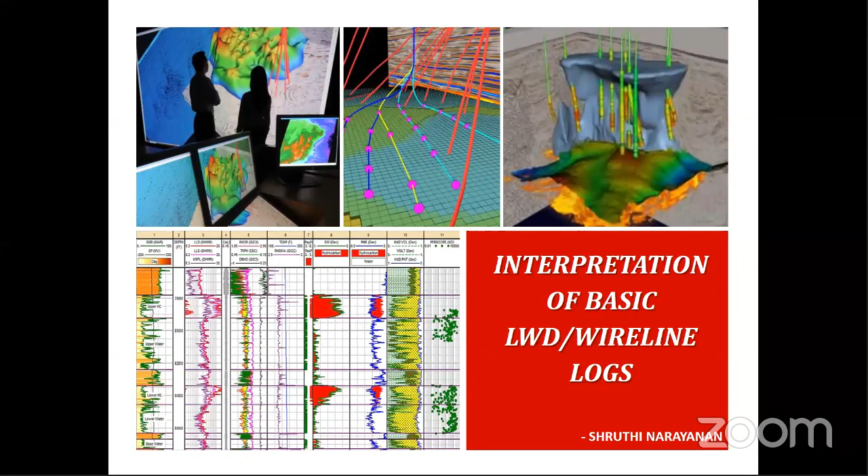Moving on to the agenda of the webinar, I will begin by giving you a brief idea of LWD and wireline logging, the concepts, differences, and their objectives. This will be followed by a section on interpretation of the basic logs such as caliper, SP, gamma ray, resistivity, density, and neutron. The final sections will cover qualitative and quantitative interpretation of the logs.

LWD and wireline logging concepts. Coming to the concepts of LWD and wireline logging. LWD is short for logging while drilling. It is the measurement of formation properties during drilling. It is a technique of conveying well logging tools or sensors into the wellbore as part of the bottom hole assembly. The figure is an example of an LWD tool provided by Halliburton. It conducts the directional survey as well as measures total gamma ray of the formation being drilled and simultaneously displays data to monitors at the surface.

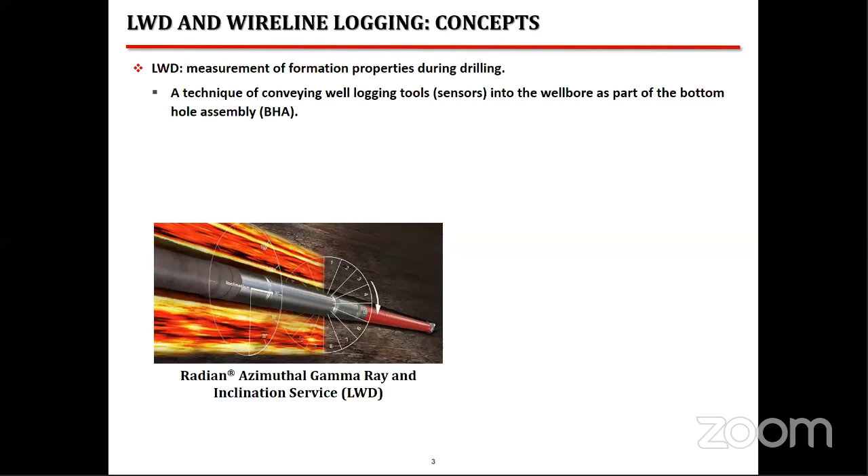The next is wireline logging. Wireline logging is the measurement of formation properties after drilling of a section is concluded. It is a technique of lowering a string of one or more instruments or logging tools on the end of a wireline into a borehole and recording petrophysical properties using a variety of sensors. The figure here is an example of a wireline tool provided by Halliburton. The logging suite provides us the standard range of logs from caliper, gamma ray, resistivity, to porosity, that is neutron and density. LWD and wireline tools and services are also provided by other service providers in the oil and gas industry.

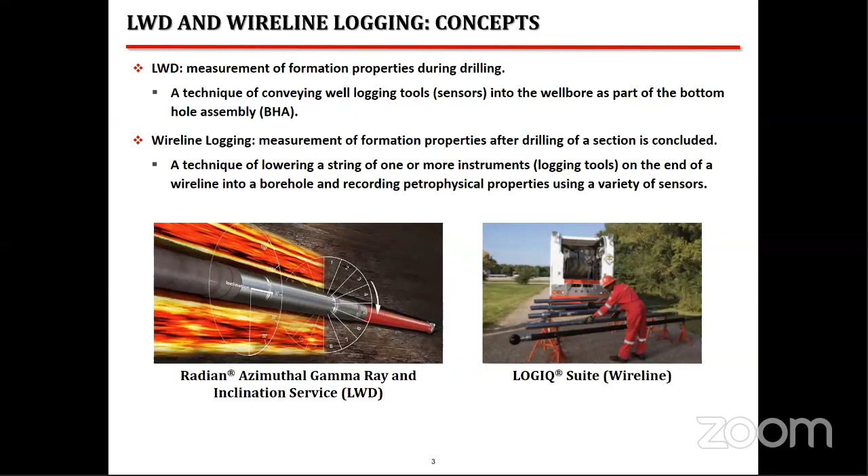Now, for the differences between LWD and wireline logging. The major differences stem from the differing timing of their use. While LWD is carried out while drilling, wireline logging is carried out after drilling of the section has concluded. As a result of this, wireline logging utilizes additional rig time, while LWD is less time consuming. Another important point to be noted is that the LWD tool or sensors form a part of the bottom hole assembly. Because of this arrangement, LWD possesses some advantages over wireline logging.

These are: number one, LWD is very useful for directional or horizontal wells, while wireline is preferred for vertical wells. This is because an LWD tool can provide better depth accuracy and improved well placement during a directional survey. Also, during the drilling phase, the drilling mud is in constant movement in the wellbore, due to which issues such as tool stuck up or mud invasion into the formation can be largely negated. On the other hand, these are major issues encountered in wireline logging which lead to severe NPTs.

Now, the fact that the LWD tool forms a part of the BHA also negatively impacts the value of an LWD survey in the following manner. The most important is that only basic tools such as directional tools, caliper, gamma ray, and porosity can be attached to the BHA, as adding more tools increases the weight on bit, which in turn will necessitate the use of a higher horsepower rig than required. However, even advanced logging tools such as NMR, FMI, and CBL VDL can be run using wireline and small horsepower rigs. Also, during the drilling phase, the borehole environment is constantly changing. That is, it is dynamic in nature, and hence the associated vibrations or movements produce more noise than in a nearly static wireline logging borehole environment.

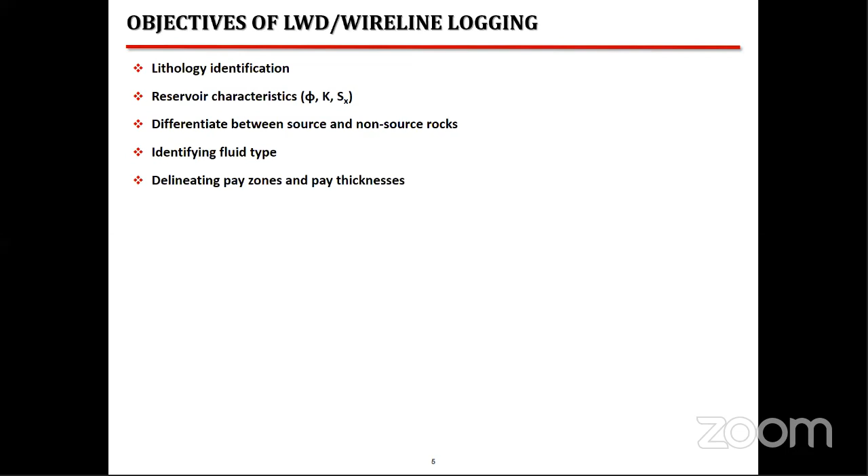Differentiating between source and non-source rocks such as sandstone and shale. Identifying the fluid type, whether water or hydrocarbon is present. Delineating pay zones and pay thicknesses, that is, identifying the exact depths at which hydrocarbon occurs. Locating fluid contacts. This involves marking the depth of the last known hydrocarbon or the depth at which fluid changes from hydrocarbon to water in the formation.

Lastly, the logs are used for well correlation in order to determine the areal extent of a reservoir. This takes into consideration the formation attitude, facies variation, both vertically and laterally, and the depositional environment. Now, for any particular depth interval, it is imperative to carry out the following essential deductions. We need to first delineate a reservoir from a non-reservoir. A reservoir usually has high porosity, whereas a non-reservoir has low porosity.

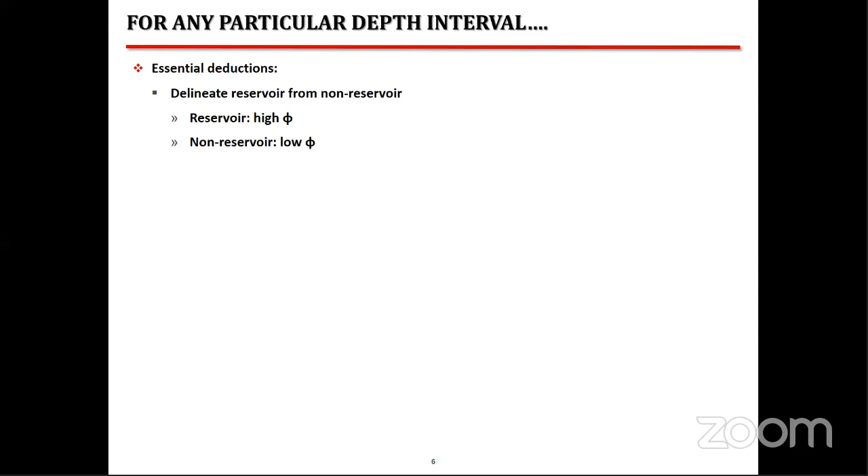Once you identify the reservoir, the next deduction is to determine the fluid type and saturation. Water, being usually saline in the formation, is highly conductive and hence low resistivity, and it has high water saturation. Hydrocarbon, on the other hand, is highly resistive and has low water saturation. Lastly, we need to identify whether the hydrocarbon is oil or gas. Oil tends to be more dense than gas.

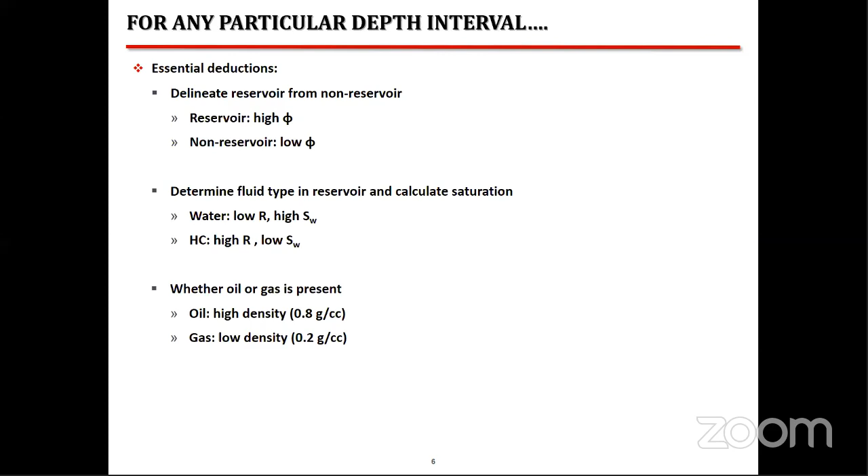Now, when the size and spacing between the source and the receiver sensors is small, such as in a micro-resistivity log, the result is better resolution, which is 2 to 5 centimeters, but poor depth of investigation, which is less than 20 centimeters away from the wellbore. On the other hand, when the size and spacing between the sensors is large, for example, lateral logs or induction logs,

the result is poor vertical resolution, that is, formations or beds that have thicknesses lesser than 80 centimeters will not be identified clearly by lateral logs or induction logs. However, they give us better depth of investigation, which ranges from 1.7 to 2.5 meters into the wellbore. Sonic, density, gamma ray, and neutron logs have resolutions and depth of investigations between the above two.

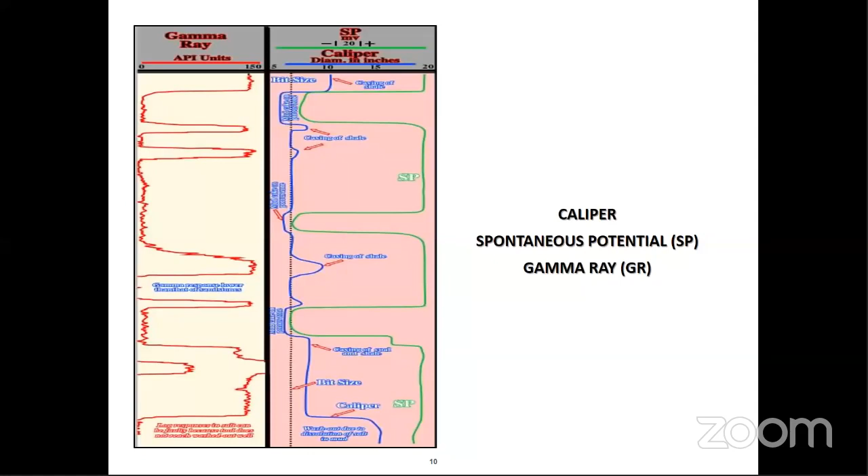I now come to the next section of my presentation, which will be a discussion on the various basic logs: caliper, spontaneous potential, and gamma ray logs. A caliper log measures the size and shape of a borehole along its depth. It is an important indicator of caving zones and swelling shales. It is an indicator of good permeability and porosity zones due to the development of mud cake in association with the gamma ray log. It is finally also used to calculate the volume of cement needed behind the casing.

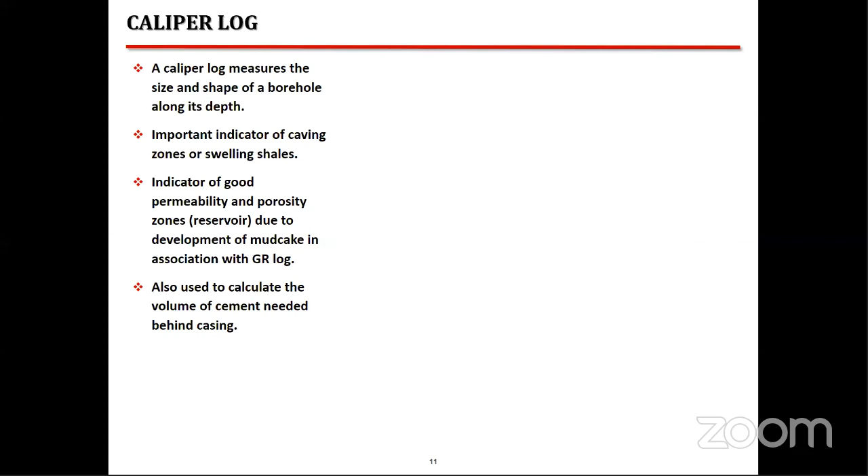A lower caliper reading will be obtained under two conditions: a highly permeable sandstone or a limestone, in which case a mud cake is formed along the borehole wall, causing very low caliper reading, or swelling of the clay minerals in a shale when water-based mud is used while drilling. Both of these can lead to reduction in caliper than the bit size.

The caliper will read on gauge, that is, the caliper reading will be similar to the bit size reading in well consolidated and non-permeable formations such as massive sandstones or limestones, igneous and metamorphic rocks. The next is spontaneous potential log.

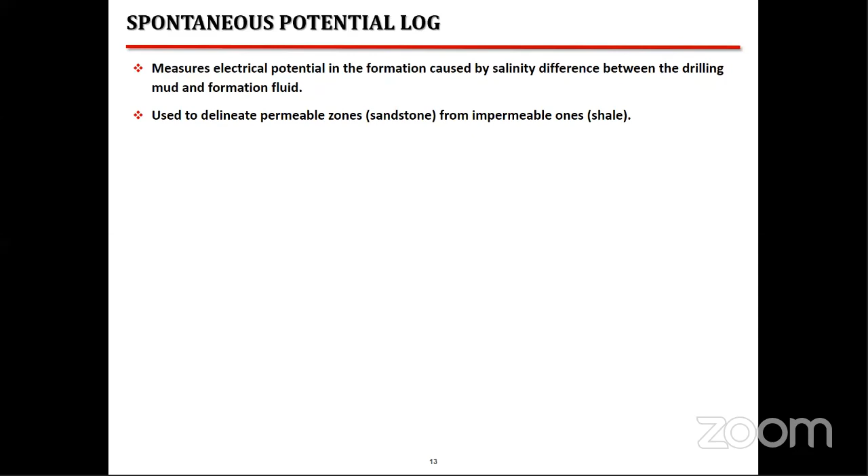It measures the electrical potential in the formation caused by salinity difference between the drilling mud and formation fluid. It is used to delineate permeable zones, that is sandstone, from impermeable ones, that is shale. It is used in the determination of formation water resistivity.

For case C, where the mud filtrate salinity is greater than formation water salinity, we will have resistivity of mud filtrate less than resistivity of water, implying that the SP developed is positive. Now, if the formation is shale, then the SP reading will be high, while in a sandstone, the SP reading will be low.

When mud filtrate salinity is the same as formation water salinity, then the resistivities will be the same. As a result, no SP will be developed. In this case, we will not be able to distinguish between a shale and a sandstone.

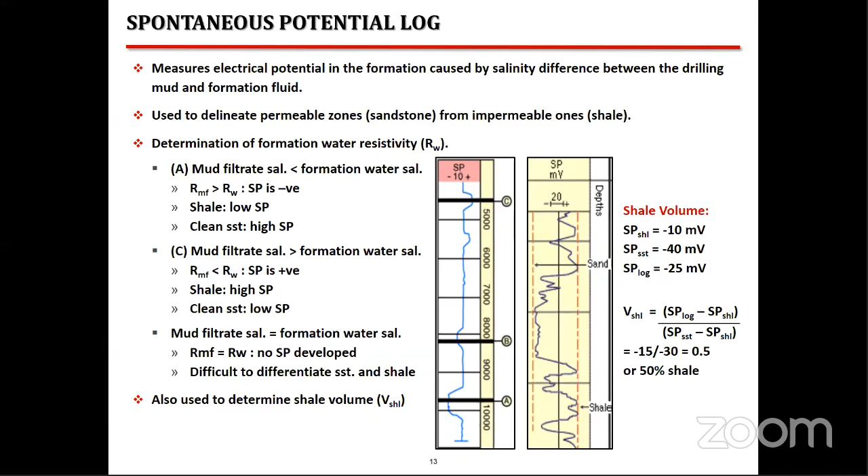Coming to the gamma ray log. Gamma ray log measures the natural radioactivity from subsurface formations such as uranium, thorium, and potassium content. Gamma ray logs are of two types: simple, where the radioactivity of all three elements are combined to give a single reading, and spectral gamma ray, where the amount of each element contributing to the radioactivity is individually reported in order to do multimineral analysis.

The main uses of a gamma ray log are for well correlation, determination of various litho boundaries, evaluation of the shale content, that is V shale, multimineral analysis when spectral gamma rays are available, and the inference of depositional environments.

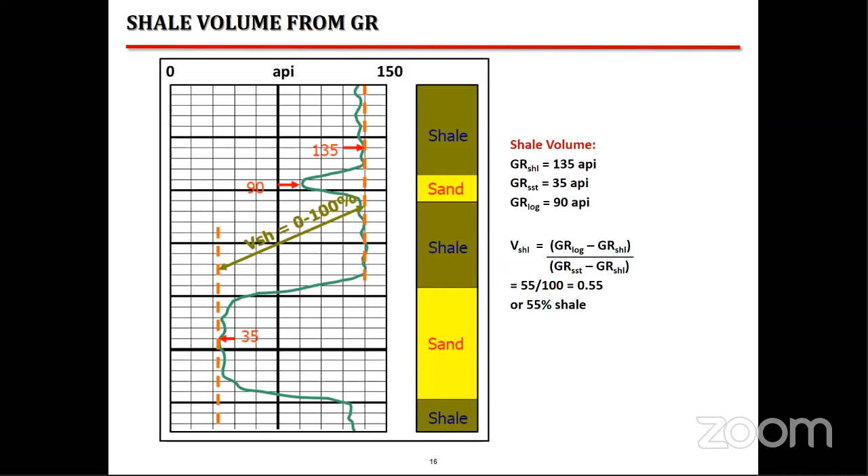Now, inferring the grain size and depositional environments from gamma ray logs. Gamma ray log trends can also be used to deduce the grain size variation both vertically and laterally, and also the associated depositional environments. A cylindrical gamma ray pattern is indicative of aggrading environments such as aeolian and evaporite deposits. A funnel-shaped or a coarsening upward gamma ray trend implies a regressing environment typical of river mouths, deltas, and shorefaces.

A bell-shaped or a fining upward gamma ray trend implies a transgressive environment typical of tidal bars and flats and the transgressive shelf. The hourglass or symmetrical gamma ray trend implies alternating pulses of transgression and regression, as is typical of a shoreface delta. Finally, the serrated or saw-teeth gamma ray trend gives us aggrading environments such as fluvial floodplains and deep marine slopes.

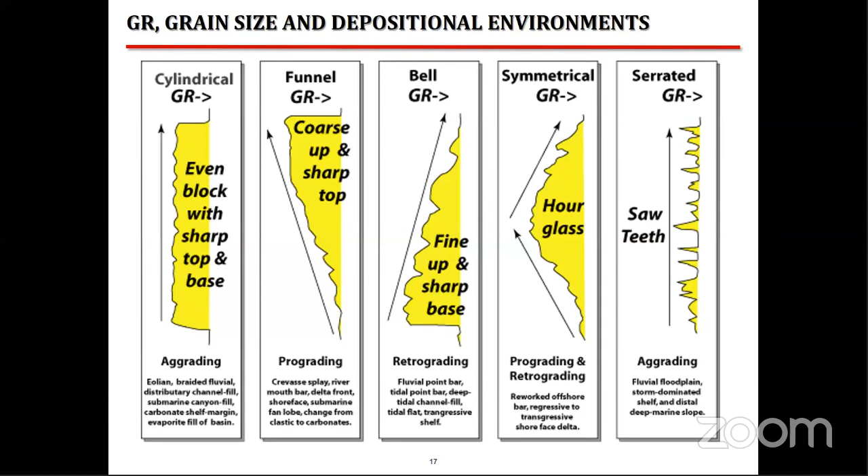Now, moving on to the electrical resistivity logs. Before proceeding to their interpretation, it is necessary to understand the borehole environment. When a formation is being drilled, three particular zones are found around the borehole. These are the invaded or the flushed zone, the transition zone, and the uninvaded zone. Each of these zones contain different fluids and therefore have different properties.

Suppose we are drilling a permeable formation using a mud whose resistivity is Rm. Then the mud cake formed along the wall of the well bore will have a resistivity of Rmc, while the mud itself will travel into the formation. Now, within the formation, adjacent to the well bore is the invaded zone containing drilling mud as the primary fluid. Thus, the resistivity of the fluid in this formation will be approximately equal to the resistivity of the mud filtrate.

Farther away from the well bore is the uninvaded zone containing the actual formation fluids. This corresponds to the true resistivity of the formation, which gives us the resistivity of the formation fluid. Resistivity is usually measured in all the three zones and correspondingly called shallow, medium, and deep resistivity, where shallow resistivity is obtained in the flushed zone, medium is obtained from the transition zone, while deep resistivity is obtained from the uninvaded zone.

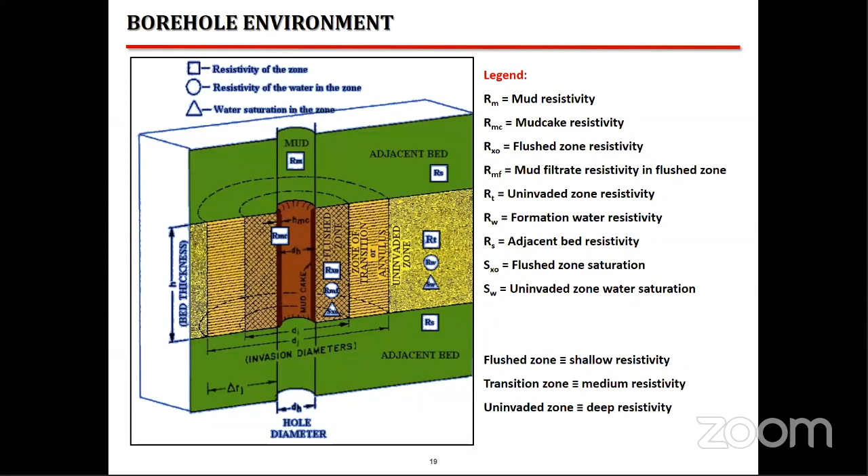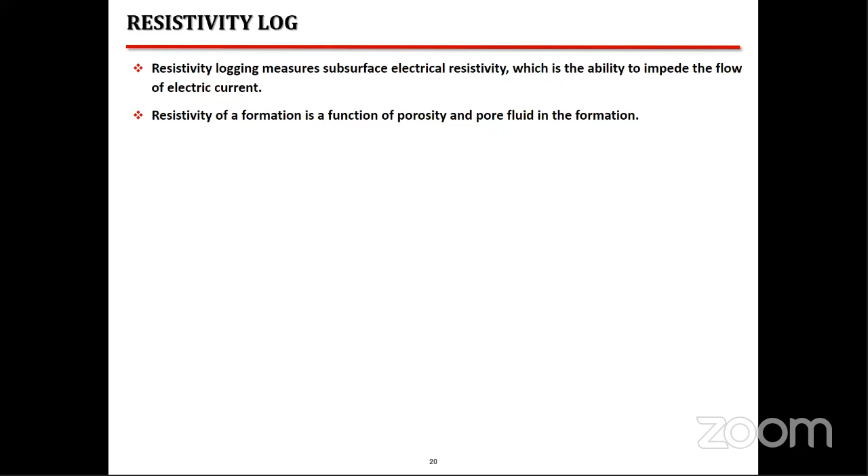Coming to the resistivity logs. Resistivity logging techniques measure subsurface electrical resistivity, which is the ability to impede the flow of electrical current. Resistivity of a formation is a function of porosity and pore fluid in the formation. The main uses of a resistivity log are to determine the fluid present in the formation. Saline water is highly conductive and hence has low resistivity, while hydrocarbon has high resistivity.

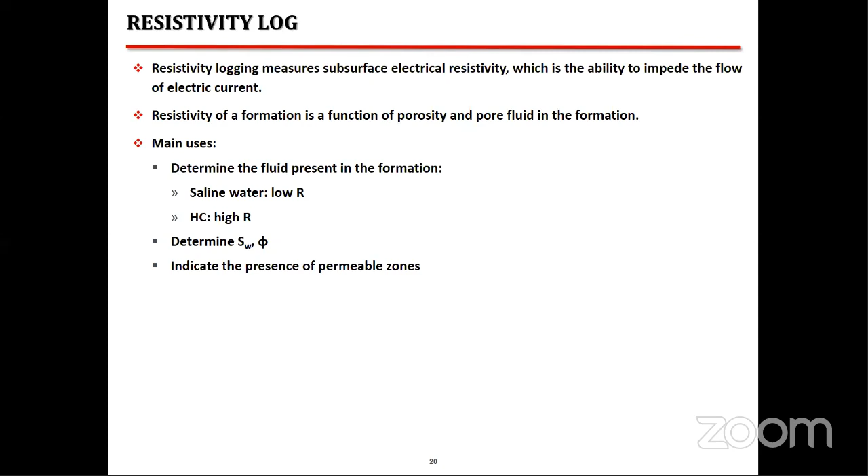Determining water saturation and porosity, and also indicating the presence or absence of permeable zones by the formation of a mud cake. Some common resistivity tools are based on their depths of investigation, where we have MSFL, that is microspherically focused logs, for shallow depths of investigation, and laterologs, that is LLS and LLD, for medium and deep resistivity measurements.

MSFL devices are characterized by short electrode spacing of only a few inches. This limits the tool to shallow depths of investigation of only 4 inches. The main uses of MSFL logs are to determine the flushed zone saturation, to determine residual oil saturation, hydrocarbon movability, and estimate invasion diameter when used with deeper resistivity devices.

Laterologs LLS and LLD. They were initially developed for high salinity drilling muds applied to drill through salt layers. Focusing electrode systems are available with deep and medium depths of investigation. The main uses of LLS and LLD are to determine the true resistivity of the uninvaded zone, to distinguish between water-bearing and hydrocarbon-bearing formations, and they have better vertical resolution of thin beds of up to 2 inches.

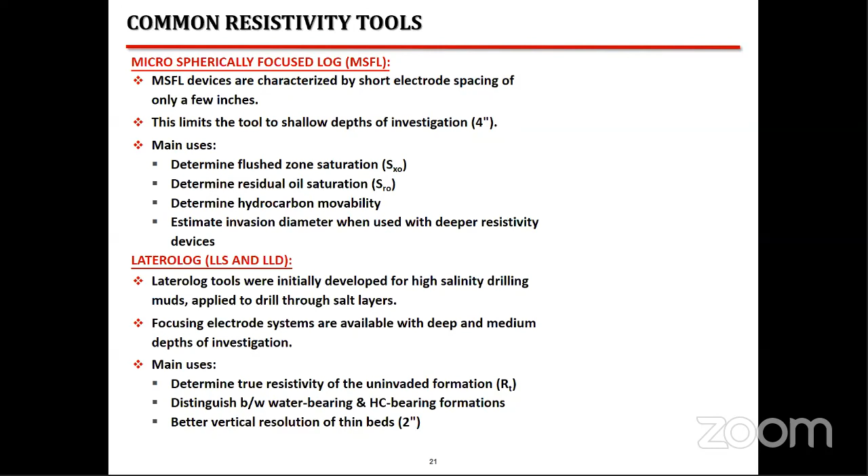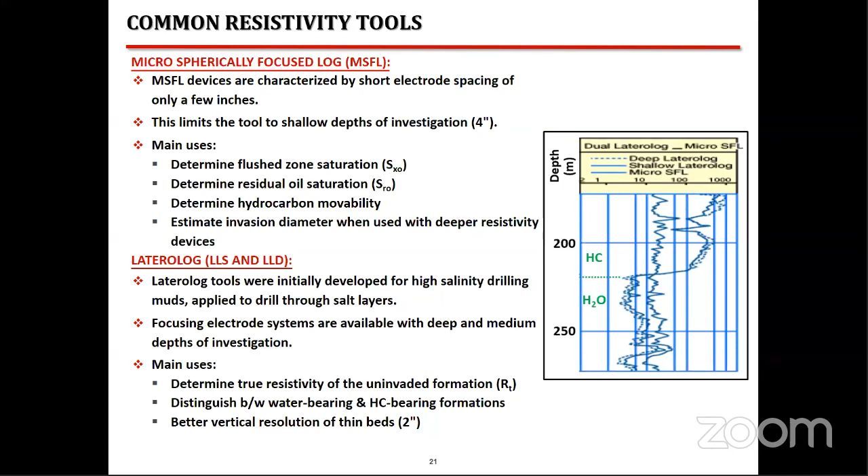The figure here shows interpretation of the fluid type from a resistivity log. Hydrocarbon and water can be easily distinguished using LLS-LLD, as hydrocarbon is highly resistive while water is conductive and has low R.

Calculation of porosity and saturation from resistivity. Archie in 1942 suggested a relationship between resistivity and porosity of the formation as phi raised to m is equal to a·Rw/Rt, where a is a tortuosity factor, m is a cementation factor, Rw is resistivity of the pore water, and Rt is the true formation resistivity.

Water saturation, Sw. An Indonesian equation for Sw relates formation resistivity, porosity, shale resistivity, and V shale. It is given by the formula below, where Vsh is the V shale that we calculate from an SP or a gamma ray log. Rsh is the resistivity obtained for a nearby clean shale. Phi e is the effective porosity of the formation, and n is the saturation exponent.

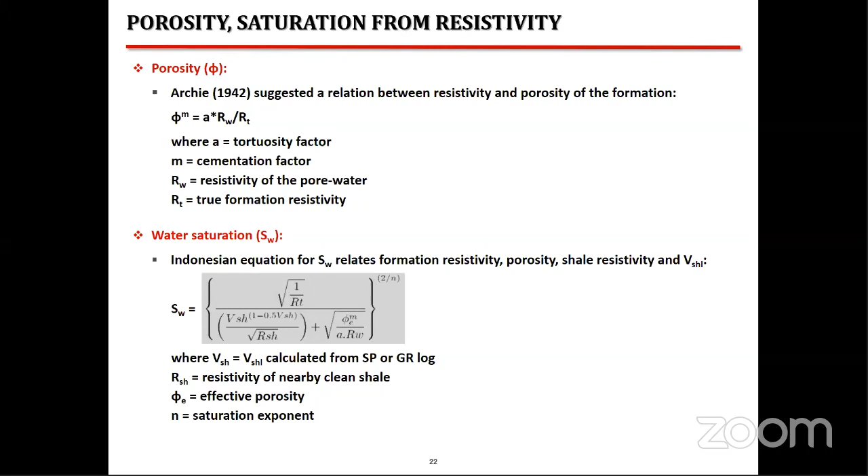Now, these constants a, m, and n, that is the tortuosity, cementation, and saturation factors, have predetermined values for typical formations. These are basically 0.81, 1.7, and 2 for sandstones, and 1, 2, and 2 for carbonates.

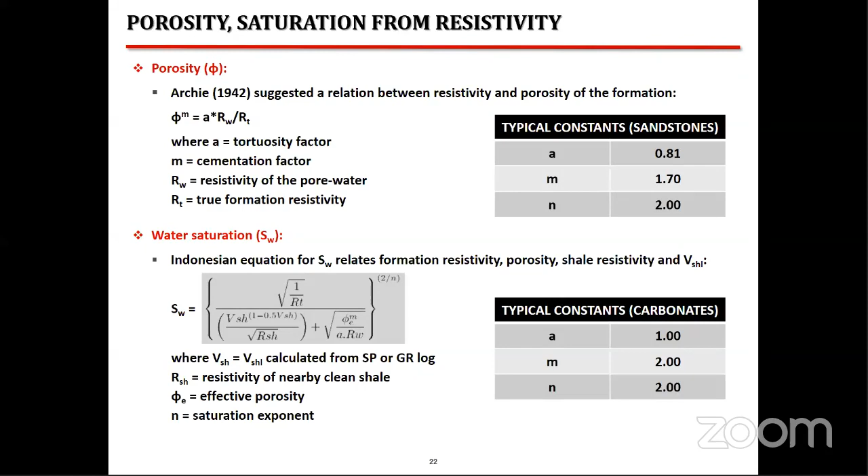Coming to the last set of logs, that is the density and neutron logs. The density log provides a continuous record of a formation's bulk density along the length of a borehole. Bulk density is a function of the density of the minerals forming a rock, that is the matrix, and the fluid enclosed in the pore spaces.

The main uses of a density log are to measure formation density, obviously, to calculate the total porosity of the formation. Combined with sonic travel time, it gives us the acoustic impedance, which is used to calibrate seismic data. It is also a very good lithology indicator. High vertical resolution of a density log helps define formation boundaries very clearly.

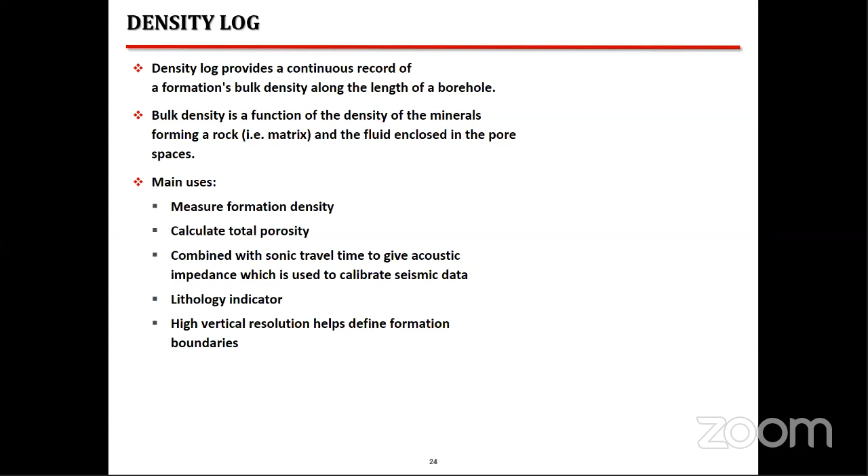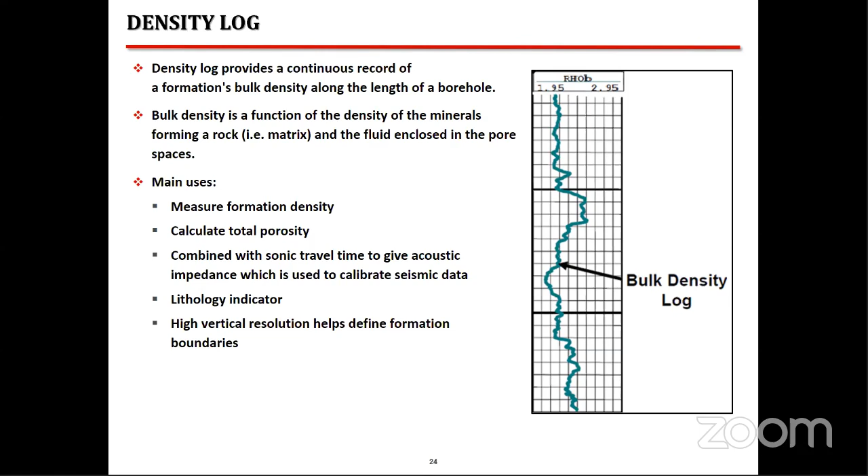This figure shows us an example of a bulk density log. Interpretation for the same, coupled with the neutron log, will be explained in further slides.

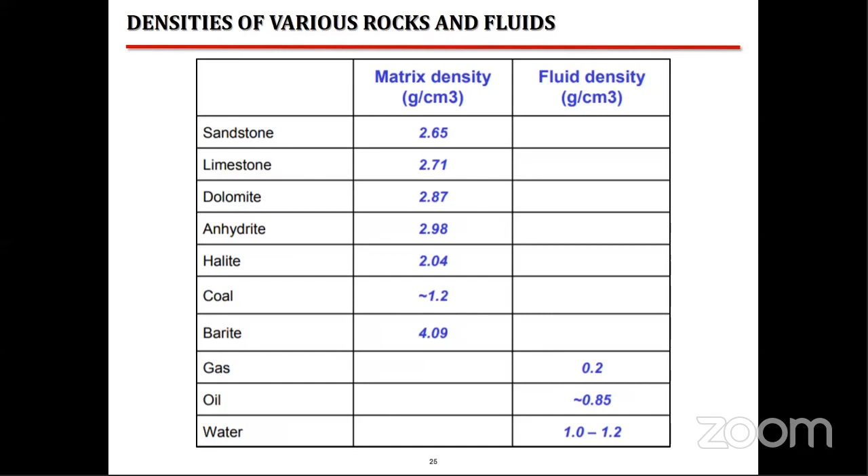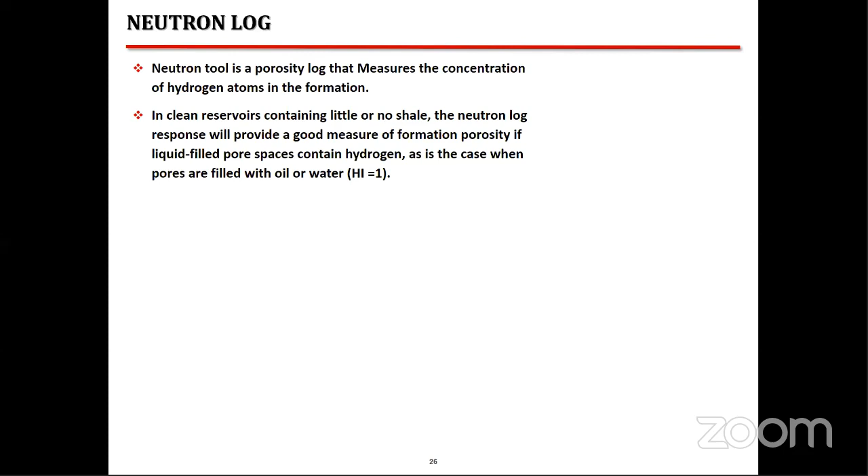Neutron log. A neutron tool is a porosity log that measures the concentration of hydrogen atoms in the formation. In clean reservoirs containing little or no shale, the neutron log response will provide a good measure of the formation porosity if liquid-filled pore spaces contain hydrogen, as is the case when pores are filled with oil or water. The main uses of a neutron log are to measure the total porosity, detection of gas in the reservoir, a lithology indicator, and calculation of shale volume.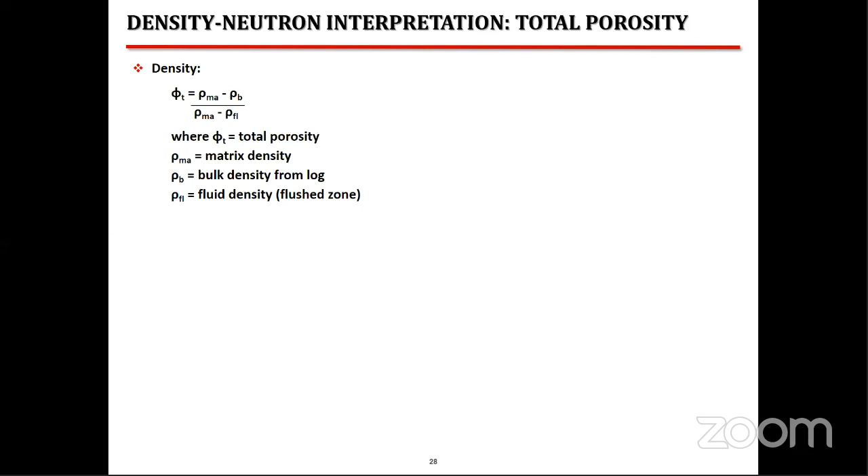Density neutron interpretation: total porosity. Using the density log, total porosity can be calculated by the below formula, where phi t is total porosity, rho ma is the matrix density, rho b is the bulk density value obtained from the log, and rho fl is the density of the fluid present in the flushed or the invaded zone.

We can also use a combination of density and neutron logs to obtain the total porosity. For water and oil zones, phi t is defined as phi d plus phi n divided by 2, where phi d is the porosity derived from density log, whereas phi n is the neutron log reading. For gas zones, the equation differs, as phi t is equal to 2 phi d plus phi n, divided by 3.

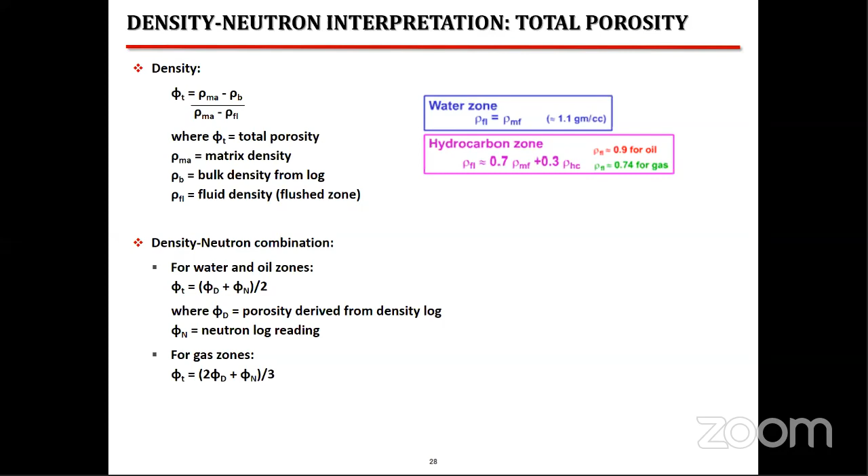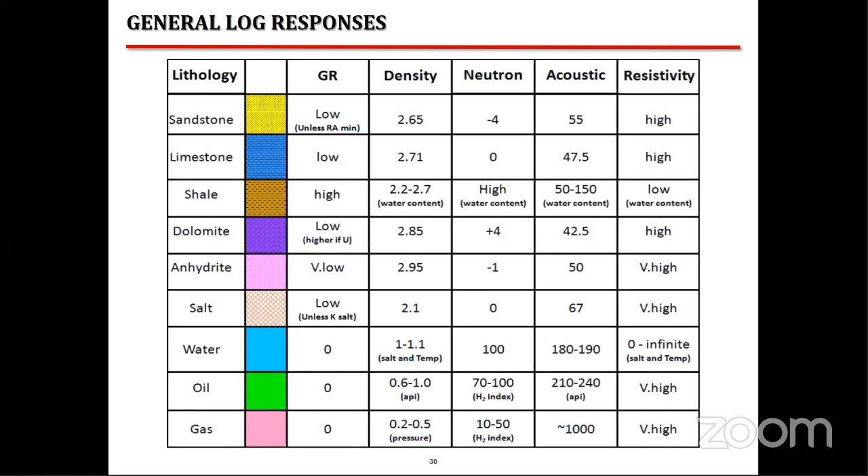Now, coming to the most important part. Interpretation of LWD or wireline logs in a qualitative manner can be easily done based on the direction in which each of the log curves deflect, be it to the left or the right, in the following sequence: gamma ray, resistivity, density, and neutron. This method has been devised by the famous petrophysicist Ko Ko Ki, and it has been passed on by a student, Dosh Nazlan, in 2016.

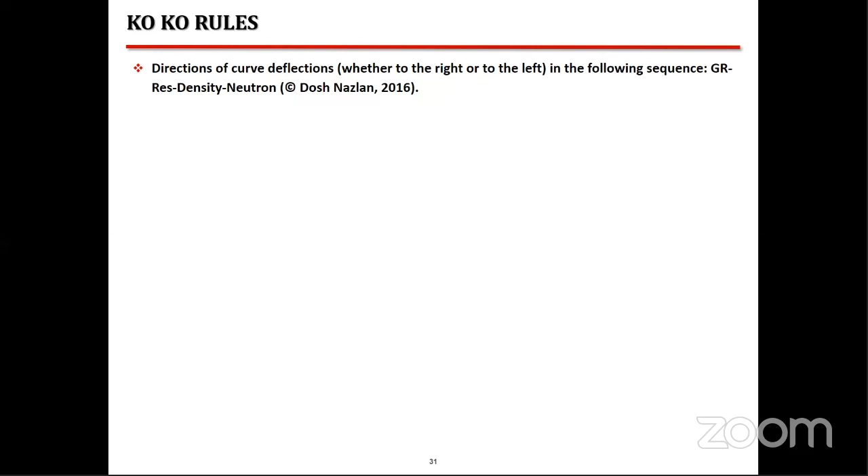The first rule is for a tight non-reservoir, where the deflections will be right, right, right, and right. Gamma ray will deflect to the right because in hard rocks, radioactive content is high and hence gamma ray readings will be high. Because the formation is also tight, the resistivity will be high, whereas the density and neutron porosities will be low.

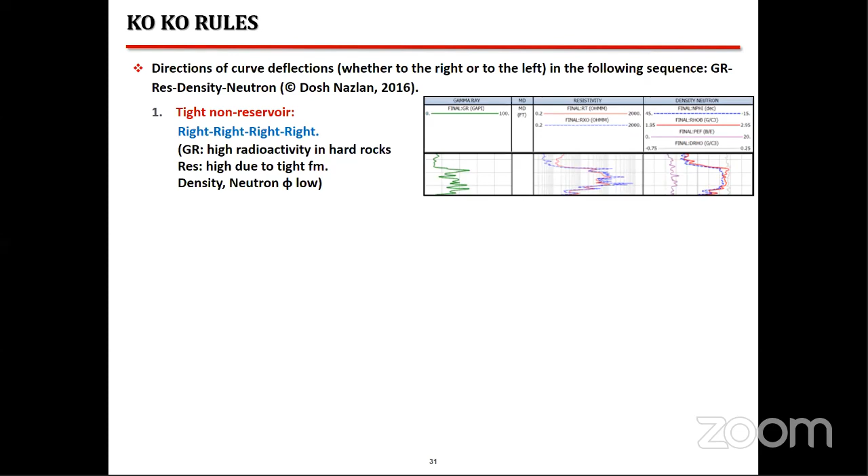The third is a tight reservoir or a low porosity reservoir, where the deflections will be to the left, right, right, and right. Gamma ray will show low radioactivity in sandstones and hence less gamma ray values. Because the formation is tight, the resistivity will be high, whereas the density and the neutron porosities will be low.

Now, coming to a water-bearing reservoir, the deflections will all be to the left. Gamma ray will show low gamma ray values in sandstones due to low radioactivity. The resistivity will be low in saline formation water, whereas the density and neutron porosity will be high in a reservoir zone because it is a sandstone which is highly porous and permeable.

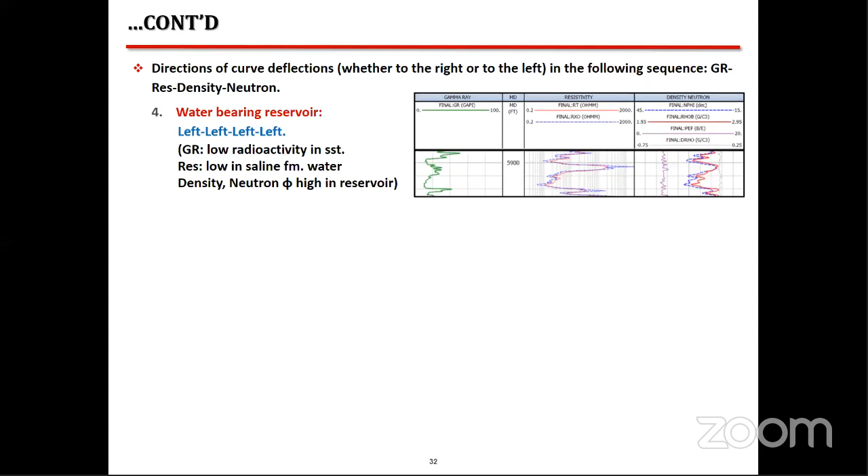I finally come to the hydrocarbon bearing zones. For an oil bearing reservoir, the deflections will be left, right, left, and left, where gamma ray will show low radioactivity, resistivity will be high due to non-conductive oil, and density and neutron porosities will be high in the reservoir.

Lastly, a gas-bearing reservoir will deflect left, right, left, right, where low radioactivity is observed in sandstones. Non-conductive gas will have high resistivity. Density will be low, mainly because gas has very low density and therefore it suppresses the density of the sandstone itself. Neutron porosity will also be low in a gas.

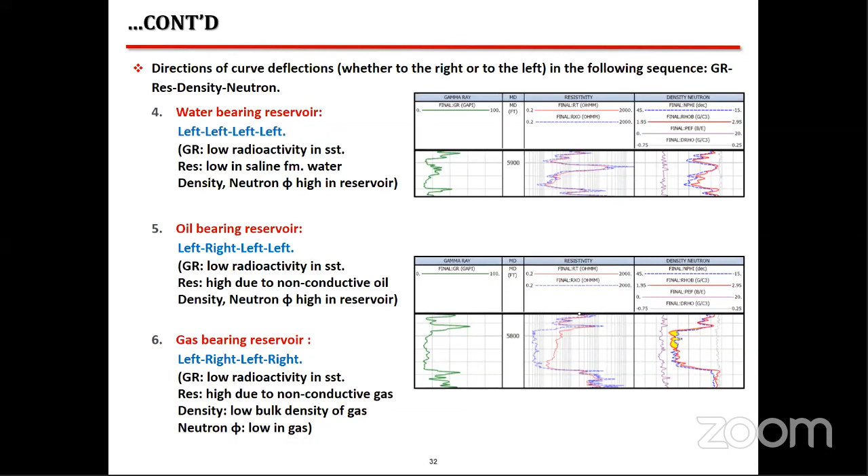I now come to the quantitative interpretation. The quantitative interpretation of LWD and wireline logs involves a specific workflow which is as follows. Firstly, calculation of the temperature gradient in the formation. This is followed by V-shale, effective porosity, permeability, and fluid saturation calculations. Next is applying various cutoffs for these calculations. And lastly, reservoir summation is carried out.

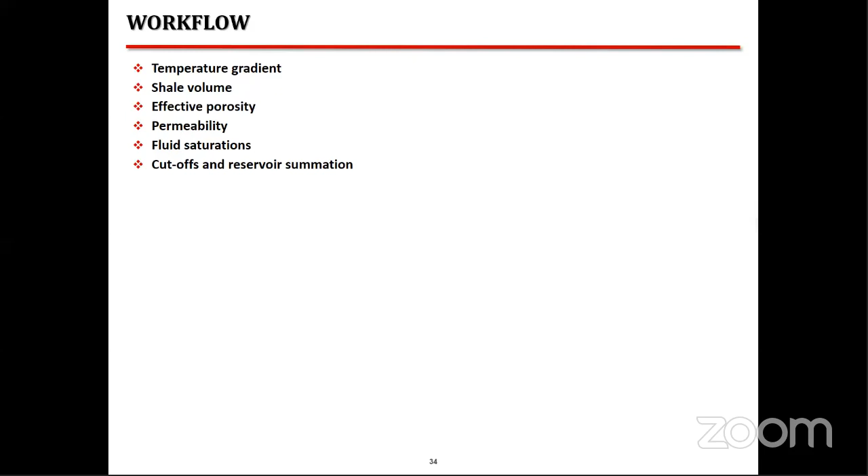So basically, the first thing that you will do when you are doing log interpretation is to determine whether you have a reservoir or not at your depth of interest. If it is a reservoir, you will then go on to determine whether or not it is a good reservoir. Now, if it is a good reservoir, this will be determined based on the porosity and permeability values that you have obtained from the logs.

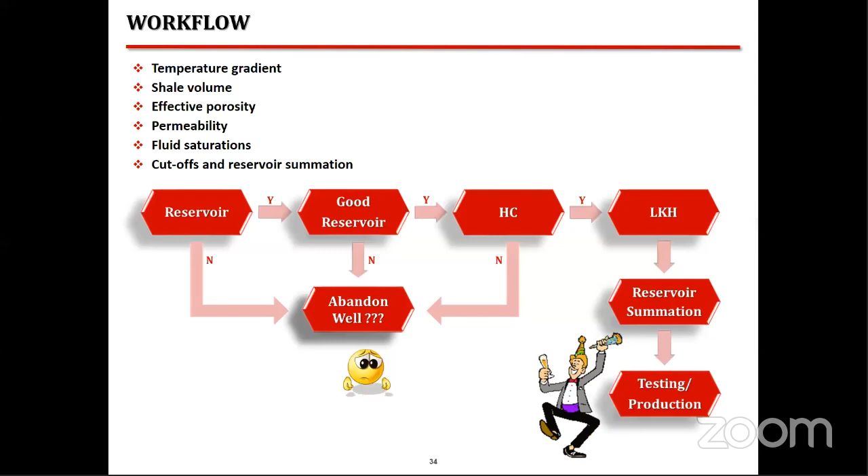If it is a good reservoir, then you will go on to determine the type of hydrocarbon or fluid present in the reservoir. Once you determine that a hydrocarbon, that is an oil or a gas, is present in the reservoir, then you will go on to determine the LKH, which is the lowest known hydrocarbon depth in the reservoir, based on various petrophysical parameters. This then leads to reservoir summation, which is then followed by testing or production, respectively, for a wildcat exploratory or development well.

I am sharing an example here with you of a well in Western Offshore Basin, India, where caliper, SP, resistivity, density, and neutron logs have been used to delineate the lower and upper hydrocarbon as well as water zones in the formations, determining the fluid type and the fluid contacts, and carrying out reservoir summation along with verification from core analysis. Various cutoffs used are as follows. The V-shale cutoffs for a clean sand and a silty sand are given below, and the effective porosity cutoff being greater than 10% and saturation less than 50% for a P50, that is a best case reservoir summation scenario.

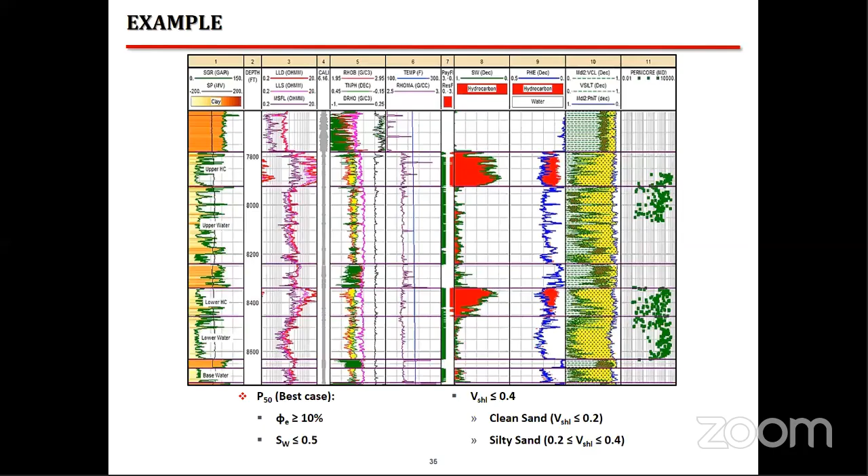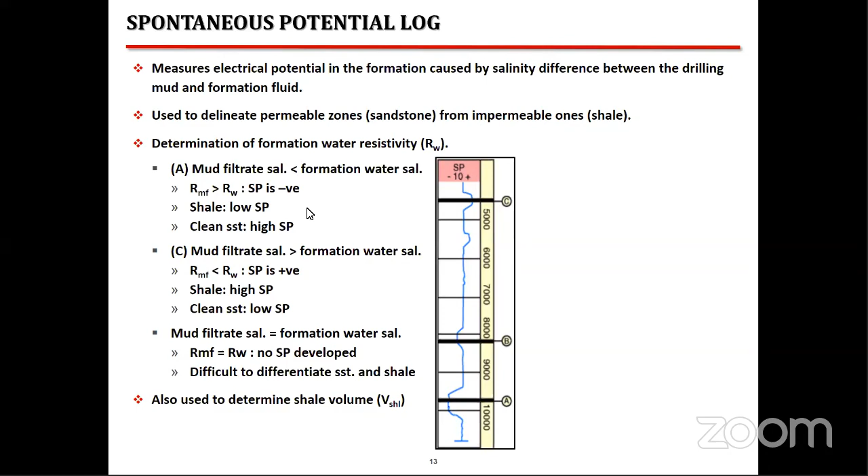All right, ma'am. Our next question is how can we differentiate shale and hard shale? What do you mean by a hard shale? Please explain. Ma'am, I don't know. Here it is written in the question: hard shale and shale. What does he mean by a hard shale? If he can explain that, then I can answer this question. Okay, ma'am. We will move to our next question. Open hole and cased hole resistivity.

No, ma'am. What can be done to provide better details when neutron porosity is done in shale rocks? What do you exactly mean by better details? Because what you get from a neutron porosity log is the total porosity.

So I do not understand this question. I'm sorry. Okay, ma'am. How is the calibration of logging tools carried out at site? That is again, like I mentioned, currently out of scope of this presentation. Calibration itself is a big process. Calibration for each and every tool is done separately; they're not done simultaneously, and there is not a standard format of calibration for all the tools together. They need to be done individually, and great care needs to be taken that they have been calibrated properly. So, like I mentioned before, books like Asquith and Rider give you all of these details. So you can always refer to them. You will get all the details in these books.

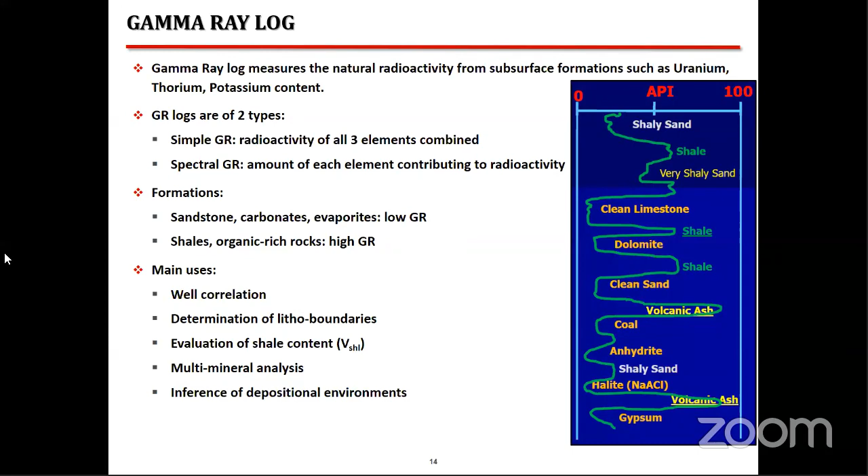Our next question is what is NMR logging and how does it work? NMR is the short form for nuclear magnetic resonance logging. It is basically a magnetic logging that is used. It is an advanced log, and like I said, all of you are asking me questions about advanced logs which are not part of the scope of this presentation today. Explaining the NMR log is going to take a very long time. I can provide you my email IDs. At the end of this webinar, you can always come back to me if you have doubts about any of the advanced logs, and we can always discuss it later.

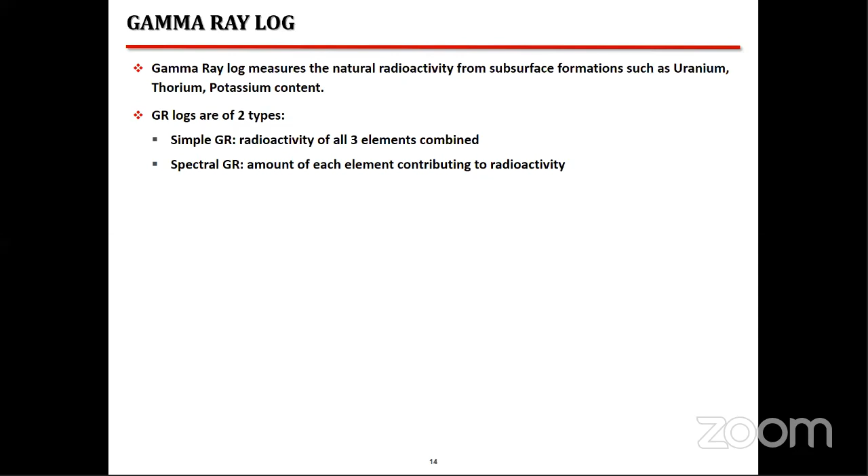All right, ma'am. So our last question is how will you differentiate the tight spot and mud cake in a caliper log, as both log interpretations are the same, as a vertical rectangle thing? No, both interpretations are not the same as a vertical rectangle. Let me explain it to you here. Yes. Now, you are asking me the difference between a tight spot and a,

Hello? Yes, ma'am. Hello? Hello, ma'am. Yeah, hi. Am I audible to you? Yes, you are audible. Can you please repeat the question? 1 second, ma'am.

How will you differentiate the tight spot and mud cake in a caliper log, as both log interpretations are the same, as a vertical rectangle thing? See, basically, when do you obtain tight spots? A tight spot is basically a situation where probably your tool gets stuck. Whereas a mud cake formation is separate. A mud cake forms along the wall of your wellbore in a permeable formation like a permeable sandstone or a limestone. Whereas a tight spot can also occur when you're drilling through a shale and the shale is swelling because of the use of water-based mud.

So in addition to the caliper log, you will also use the gamma ray log in order to determine the lithology, and then you will come to a conclusion whether the tight spot is because of the formation of a mud cake or because of the swelling of the shale that you are drilling through. So based on this, you can differentiate between a mud cake formation and a swelling shale or a tight spot.